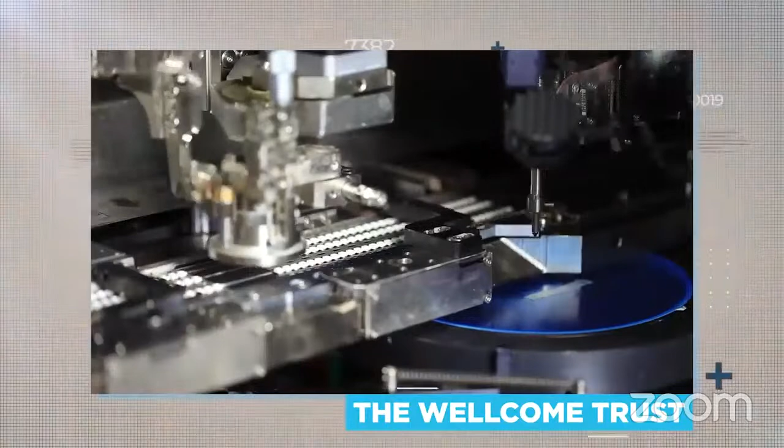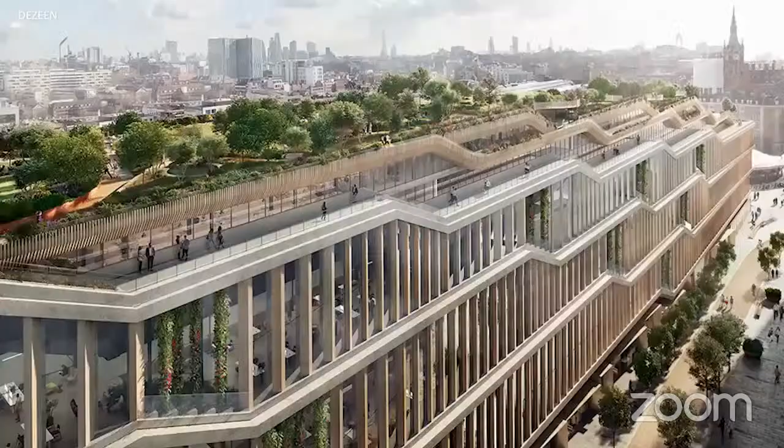Lately, this ultra-commutable egghead enclave has stolen the crown from London's other wannabe tech hub, a grimy junction above Old Street Underground cynically nicknamed Silicon Roundabout. Anyway, enter Google, whose grand new edifice is said to have cost somewhere in the region of £1 billion. It's 11 stories high and stretches 330 metres along the King's Cross railway tracks.

That's longer than London's tallest building, the Shard, is high, by the way. Many Londoners say this development makes a nice change from all those priapic skyscrapers. The new HQ was designed in a collaboration between Copenhagen's starchitect Bjarke Ingels and King's Cross-based Heatherwick Studios.

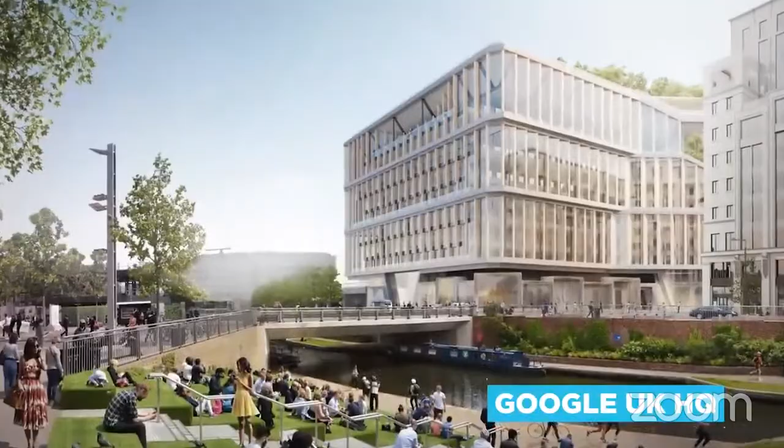Heatherwick, who as it happens just completed a lavish £100 million refit of nearby Coal Drops Yard shopping centre, is no stranger to Cockney icons. Heatherwick designed the flaming cauldron centrepiece for London's 2012 Olympic Games and the city's curvaceous new-look Routemaster buses. Google's UK HQ, which founder Larry Page commissioned after dismissing another top architect's plans as boring, really is

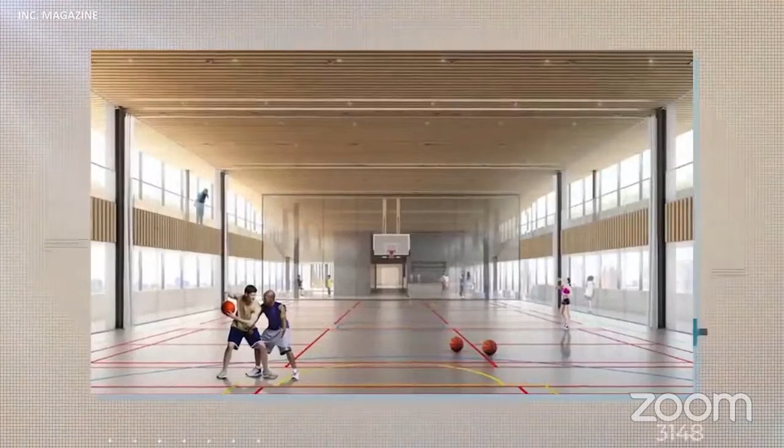a bit special. There's a large multi-lane upper-story swimming pool, cutting-edge sports facilities, a gym, 4 cafes and a multi-use games area. There's a 210-seat auditorium for product announcements and lectures. The whole structure sits atop a so-called plinth of retail and dining spots intended to, in Heatherwick's words, create variety and fascination at a human scale.

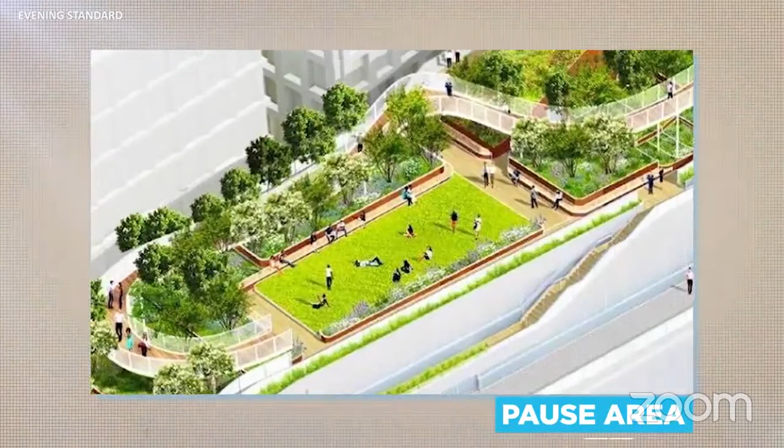On the rooftop, behold a 300-metre landscape garden divided into zones including a pause area for quiet contemplation. There's shady wooded spots dappled with pastel wildflowers, lily-covered fish ponds, rustic beehives, and a 200-metre running track commanding peerless panoramic views over London. Inside, a dramatic staircase floats diagonally through what Bjarke Ingels describes as a single confident volume akin to King's Cross Station's magnificent multi-arched concourse.

All internal routes are easy and flowing and connected in order to inspire opportunities for chance encounters and foster all-important creativity. Fundamentally, of course, it's an office block, so imagine hundreds of people staring at screens and zoning out in meetings. Hey, at least they get nap pods.

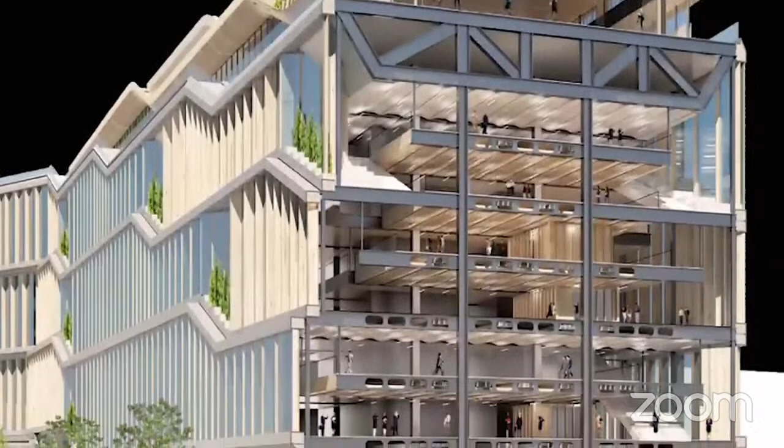The very fabric of the building was chosen in line with Google's so-called Healthy Materials Programme. This initiative traces its origins back to the early days of Google, when a fretful Larry Page would prowl the office with a handheld particle counter measuring air quality and particulates emanating from the walls and floors. Presently, Google runs a handful of offices across London.

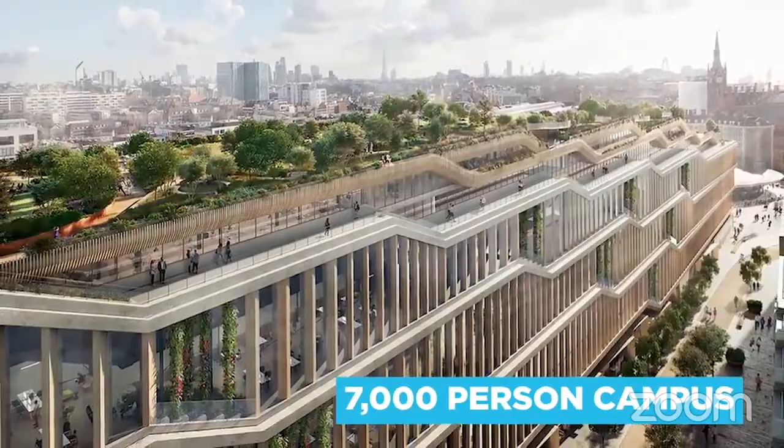Famously, its Victoria outpost has beach huts and Dodgem cars, while staff at Google's Covent Garden branch enjoy access to an allotment. This new building, alongside 2 other nearby King's Cross sites being looked at by Google, will unify its UK team on one 7,000-person campus. The centrepiece will be this, the only wholly Google designed and built building outside the US.

But hang on a minute, you're probably thinking, don't we all work from home now? At the time of writing, almost all of Google's 118,000 global employees are working in their jammies. CEO Sundar Pichai has signalled he intends this policy to stand until the end of June 2021 at any rate. Because while it's clear the nature of work has probably changed forever, Pichai still has faith in the unique alchemy

of in-person collaboration. "We firmly believe that being together, having that sense of community is super important for whenever you need to solve hard problems," he told Time magazine. "So we don't think the future is 100% remote. We value our offices, we value the culture."

Certainly, King's Cross's lunchtime restaurant and bar scene will rejoice when Google's shiny new HQ fills up with well-remunerated young go-getters potentially as soon as next year. Right now, it's still being built. Get a load of those Android logos running up its reinforced concrete core.

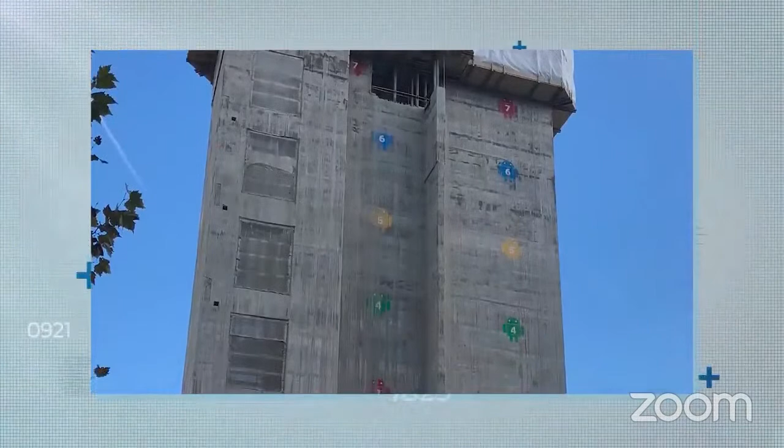But ultimately, Google's huge investment in London is a tonic for those Londoners who worry that, since the pandemic, their city has lost its mojo. Well, if anyone can help them find it... What do you think? Are these vast office hulks nothing but dinosaurs from a bygone corporate era?

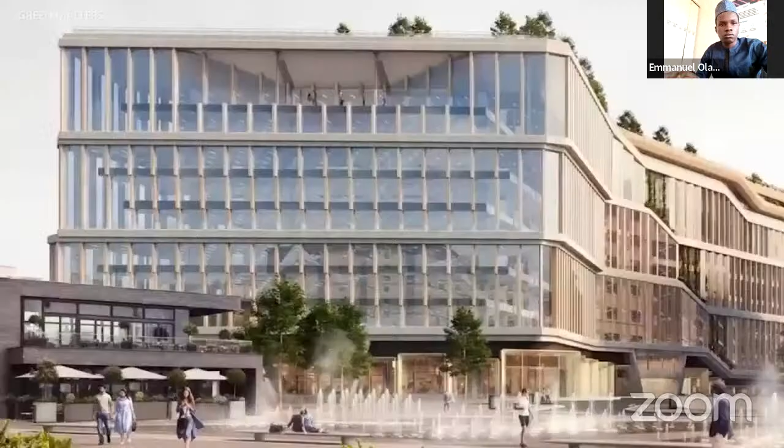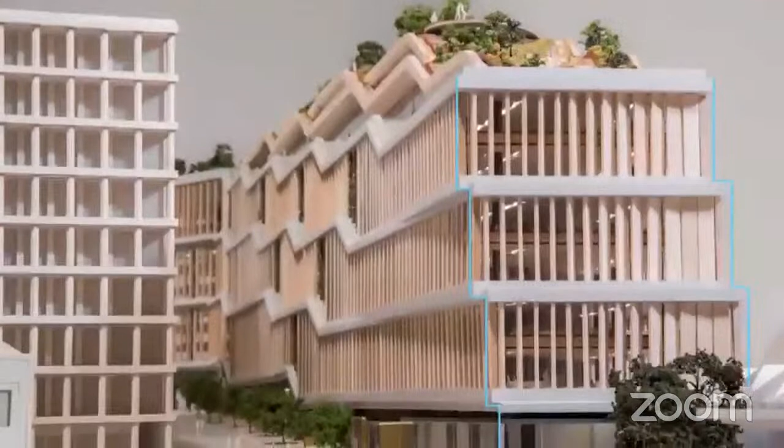This long and low Leviathan is Google's glossy new London headquarters. So lengthy it's been dubbed the land scraper by locals. Over 1 million square feet of floor space, it accommodates basketball courts, a theatre, massage parlours and nap pods shared between some 4,500 staff. So what's up with that unusual design? How's the neighbourhood? And aren't office blocks a bit 2019? Join us now for a grand tour around Google's new UK headquarters.

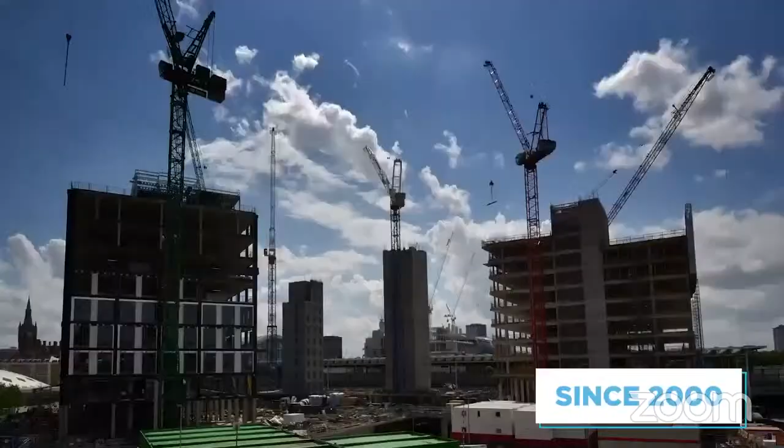The North London district of King's Cross, where Google's new gaff is going, has something of a checkered past. It was first a site of great commercial importance when the newfangled steam railways and London's Regent's Canal opened in the 19th century. Alas, from about 1980 onwards, King's Cross sadly descended into vice and squalor as old-school industry fled the city. However, since 2000, developers have been gussying up the neighbourhood through a monumental multi-decade investment programme. And it's easy to see why big employers like Google and its soon-to-be neighbour Facebook are moving in.

King's Cross is incredibly well served for transport links. You can go anywhere in London by tube in a matter of minutes. Next door you can jump on a train to Paris, not to mention the regular fast rail services to Oxford, Cambridge and Hogwarts. King's Cross is an attractive prospect for workers too. Just ask the local talent. The area is brimming with brains.

Google's new home will be within strolling distance of the British Museum, the Francis Crick and the Turing Institutes, prestigious University College London, University College Hospital, the Wellcome Trust and any number of biotech and AI startups. Lately, this ultra-commutable egghead enclave has stolen the crown from London's other wannabe tech hub, a grimy junction above Old Street Underground cynically nicknamed Silicon Roundabout.

Anyway, enter Google, whose grand new edifice is said to have cost somewhere in the region of £1 billion. It's 11 stories high and stretches 330 metres along the King's Cross railway tracks. That's longer than London's tallest building, the Shard, is high, by the way. Many Londoners say this development makes a nice change from all those priapic skyscrapers.

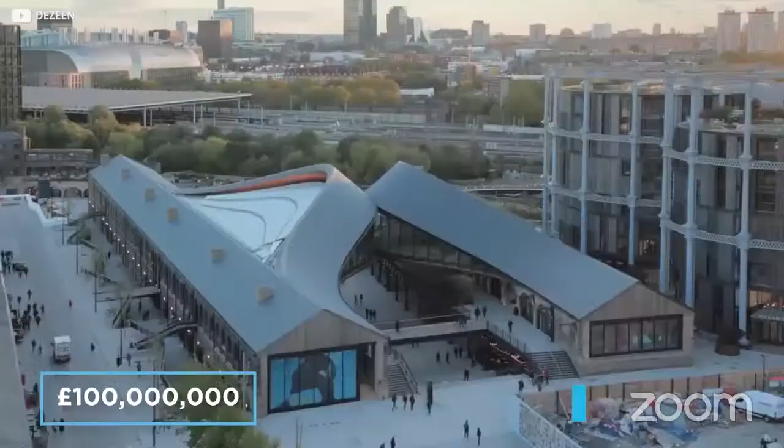The new HQ was designed in a collaboration between Copenhagen's starchitect Bjarke Ingels and King's Cross-based Heatherwick Studios. Heatherwick, who as it happens just completed a lavish £100 million refit of nearby Coal Drops Yard shopping centre, is no stranger to Cockney icons. Heatherwick designed the flaming cauldron centrepiece for London's 2012 Olympic Games and the city's curvaceous new-look Routemaster buses.

Google's UK HQ, which founder Larry Page commissioned after dismissing another top architect's plans as boring, really is a bit special. There's a large multi-lane upper-storey swimming pool, cutting-edge sports facilities, a gym, 4 cafes and a multi-use games area. There's a 210-seat auditorium for product announcements and lectures. The whole structure sits atop a so-called plinth of retail and dining spots intended to, in Heatherwick's words, create variety and fascination at a human scale.

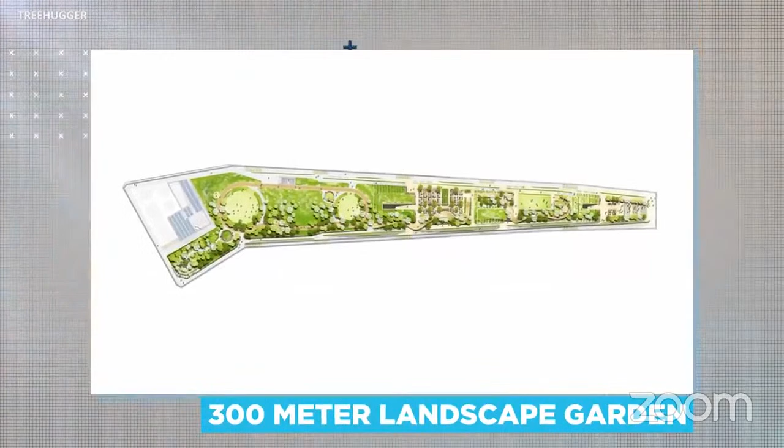On the rooftop, behold a 300-metre landscape garden divided into zones including a pause area for quiet contemplation. There's shady wooded spots dappled with pastel wildflowers, lily-covered fish ponds, rustic beehives, and a 200-metre running track commanding peerless panoramic views over London. Inside, a dramatic staircase floats diagonally through what Bjarke Ingels describes as a single confident volume akin to King's Cross Station's magnificent multi-arched concourse.

All internal routes are easy and flowing and connected in order to inspire opportunities for chance encounters and foster all-important creativity. Fundamentally, of course, it's an office block, so imagine hundreds of people staring at screens and zoning out in meetings. Hey, at least they get nap pods.

The very fabric of the building was chosen in line with Google's so-called Healthy Materials Programme. This initiative traces its origins back to the early days of Google, when a fretful Larry Page would prowl the office with a handheld particle counter measuring air quality and particulates emanating from the walls and floors. Presently, Google runs a handful of offices across London. Famously, its Victoria outpost has beach huts and Dodgem cars, while staff at Google's Covent Garden branch enjoy access to an allotment.

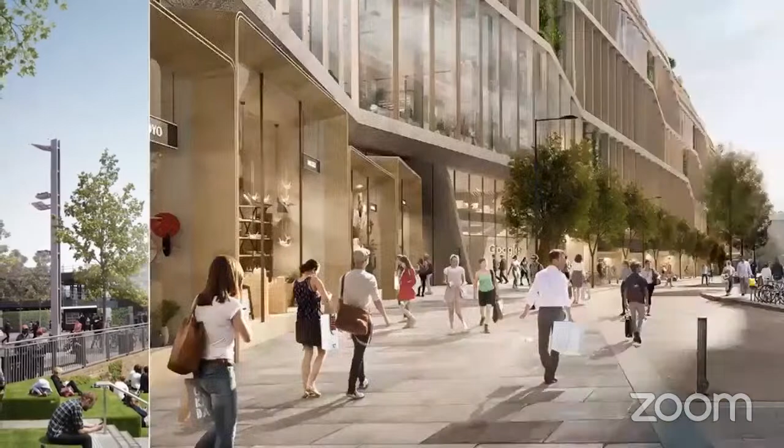This new building, alongside two other nearby King's Cross sites being looked at by Google, will unify its UK team on one 7,000-person campus. The centerpiece will be this, the only wholly Google designed and built building outside the US. But hang on a minute, you're probably thinking, don't we all work from home now? At the time of writing, almost all of Google's 118,000 global employees are working in their jammies. CEO Sundar Pichai has signaled he intends this policy to stand until the end of June 2021 at any rate.

Because while it's clear the nature of work has probably changed forever, Pichai still has faith in the unique alchemy of in-person collaboration. "We firmly believe that being together, having that sense of community is super important for whenever you need to solve hard problems," he told Time magazine. "So we don't think the future is 100% remote. We value our offices, we value the culture."

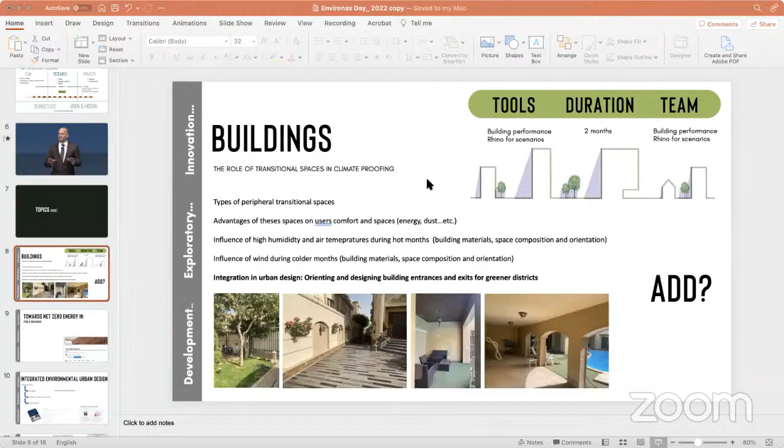Again, I think you stopped sharing it. Yes, sorry. Okay. All right. So these are examples, I will start highlighting the examples. You still don't have it in full screen. I think you might have to stop sharing and reshare again. Yeah, I will. All right. Apologies for the inconvenience. Yeah, apologies from my end as well. No, it does not work. It's not working. Maybe you have to activate the full screen before you start sharing. Okay. That could be a good idea. No, that's not possible.

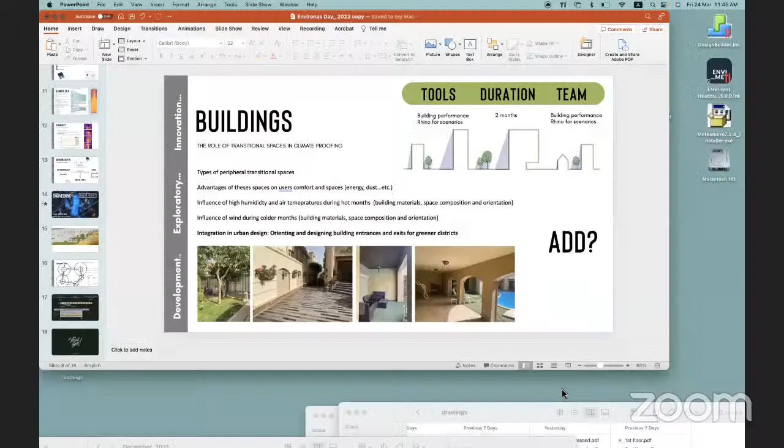All right, perfect now. Thank you very much.

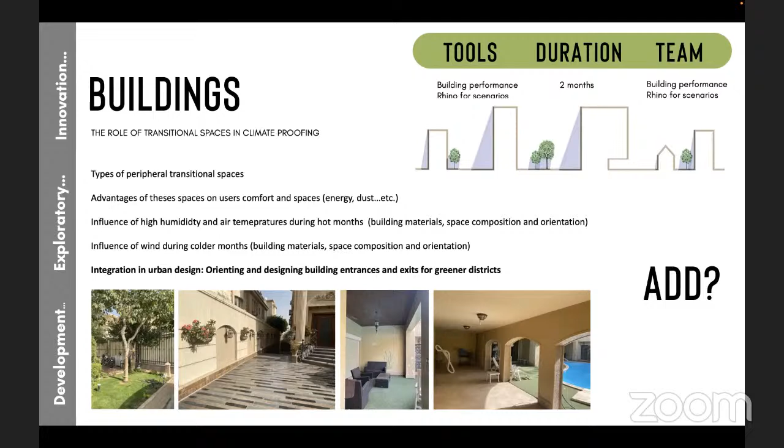Okay, so in this particular research track, the focus is basically on buildings. It's the role of transitional spaces in climate proofing. And transitional spaces are terraces, front yards, all the spaces that create a spatial buffer between the outdoor and the indoor environment. So some environmental monitoring was conducted. I wouldn't want to highlight a lot on that.

So let me now move towards net zero energy, because this was the other example I was going to highlight today, which is the net zero approach in buildings. The net zero approach in buildings is, let's say, optimum solutions for green buildings. So instead of putting a benchmark where you have to reduce the emissions and improve the environmental performance of these buildings while elevating the user's comfort, this benchmark is being raised higher and higher, where you want to achieve a balance between all the spending in energy and all the production of energy.

So you want to produce as much as you are able to consume. And I think this is the whole idea of replenishing the resources, trying to reverse the climate change effect, where we want to replenish the resources that we are discussing in many of the other sessions I'm sure you attended. The idea of net zero for each building comes from that: that you're trying to take from the environment and give back in a clean way.

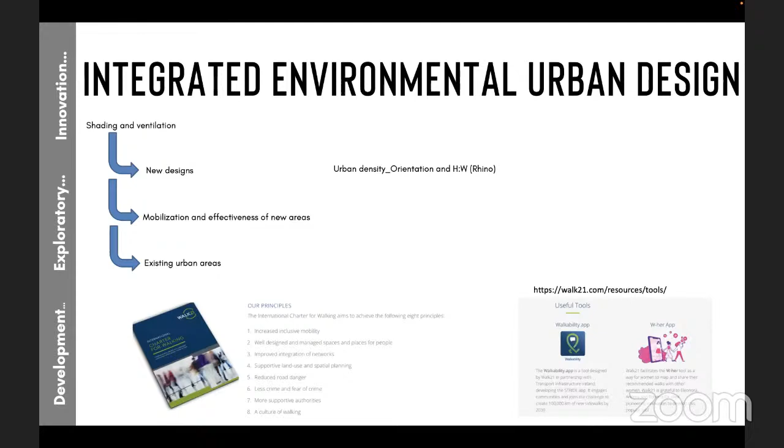This was a research about climate change, and it looks into the different parameters. So we look into the phenomena, the seasonal variation that's taking place in different cities, and how these seasonal variations are being changed over time. So I will again relate it to the example that I was discussing now.

So when we are designing a certain building, and we want to deliver the performance of that building by 2050, we have to take into consideration what effects will be taking place during that year. It will not be like today, because if climate change is affecting us this much today compared to 20 years back, we would expect that the targets we are trying to meet in 15 or 20 years would require a different strategy.

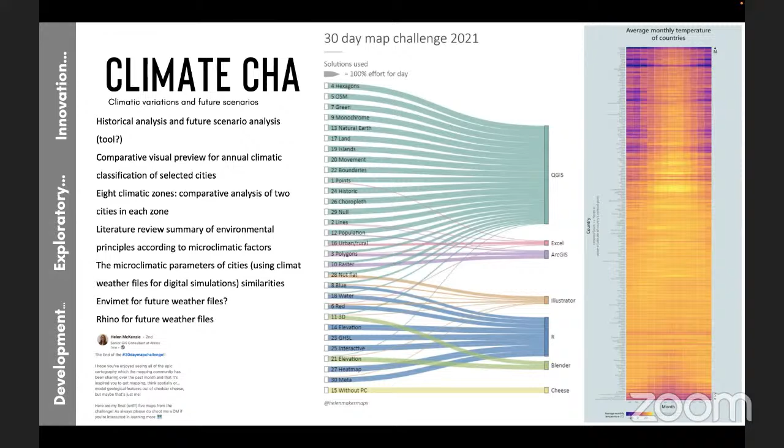So we take that into consideration in terms of the analysis, and it's very important, I would say for younger people who are starting their career, not only to focus on solving the problem at hand. Let's try to find a solution for what's happening now, but perhaps take another leap and look at these effects and try to provide the solutions we provide today in buildings, for example in terms of design solutions, or in another sector, that would fit 15 or 20 years from now.

So the intention that I consistently try to look into is how people, user-friendly environments, would be able to affect back the climate and the built environment. We want to convey our message that the needs and requirements of the users should be taken into consideration when we design cities, which is sometimes ignored, or when we design buildings. Then we live in these cities and buildings, and they affect us sometimes negatively, but we're not able to affect that back. We're just harming the environment more, either by providing alternative solutions, demolishing, or extended energy demands and so on.

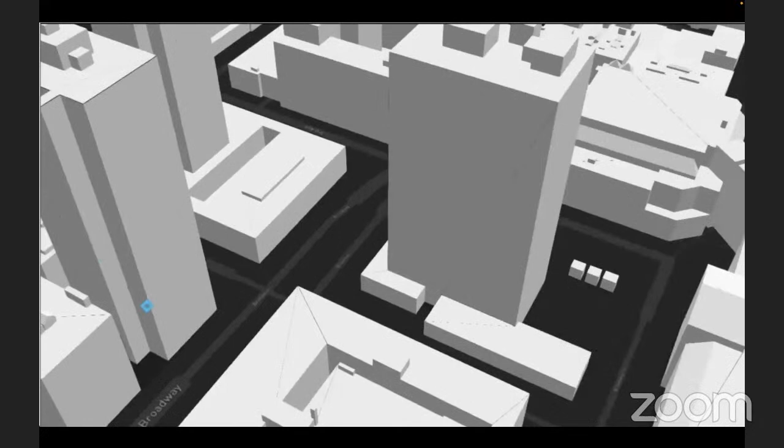So this video basically discusses the idea or the role of technology, which is taking place vastly now in cities and buildings as well. The idea of smart buildings is a small scale of it, where everything is automated. On a bigger scale, it's the IoT or the big data part in cities and how each and every building is being linked together: infrastructure, water consumption, energy demand, with many other things.

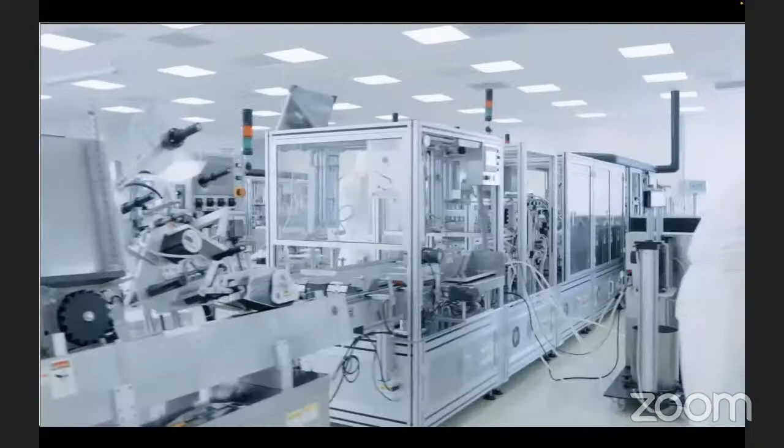So all of these layers could not only be used to convey what's happening on real ground, but we could also be providing solutions from these data based on actual research that we conduct. So yes, they do deliver a message, but I think the innovations in digital twinning are taking place currently in few countries worldwide. We look into that on a very small scale.

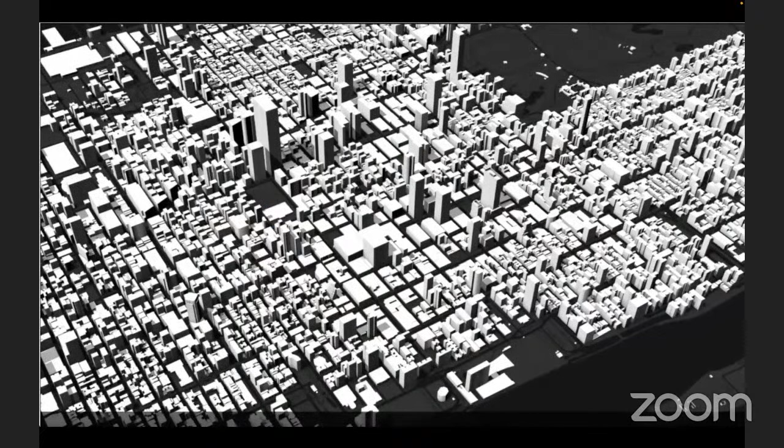So how can we mimic, let's say, imitate what's happening in this particular city in a digital world or in a virtual world? And when we mimic this particular condition based on the existing scenario, we can then derive different scenarios, and these different scenarios could have the interventions of addressing climate change or even trying to find other solutions. And these solutions would be tailored for each and every specific context.

So I wouldn't say that we are trying to find solutions for these global problems that we look into, for example, in different cities that we are currently at. Yet at the same time, this variety of solutions fits different developing and developed countries, I would say.

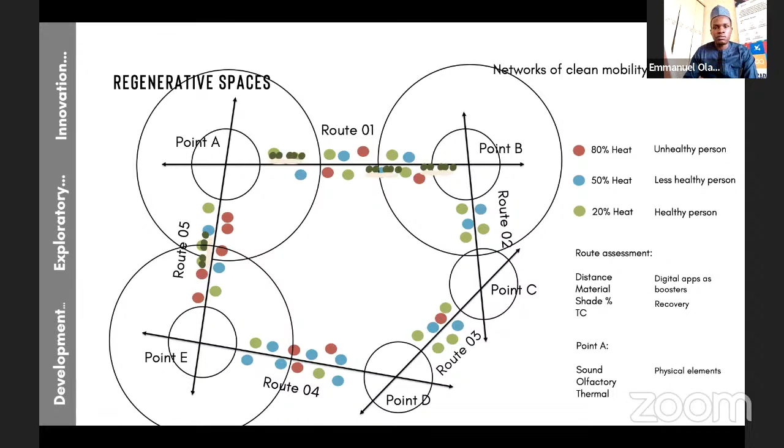Okay, so basically, this is touching upon the last video that we have seen. It's very important when we discuss these IoT and digital twinning scenarios. We look into that, not that we conduct them. I do not conduct them myself. However, you look into the behavior of people. I go back to the idea of

human-induced climate change. So the behavioral patterns of people in streets and in buildings, and how they deal with reacting to the environmental catastrophes, the environmental changes that are taking place, would in itself give a lot of influence on people who are able to deal with these solutions and probably try to find optimum scenarios that fit certain contexts.

So this in itself looks into the idea of walkability between different spaces and how much heat is being imposed on each and every person. And if they are able to convey that through an application, basically, so report that I'm feeling hot, I'm not able to walk through this route anymore, it's bothering me very much, how much would this small piece of information log into the bigger picture?

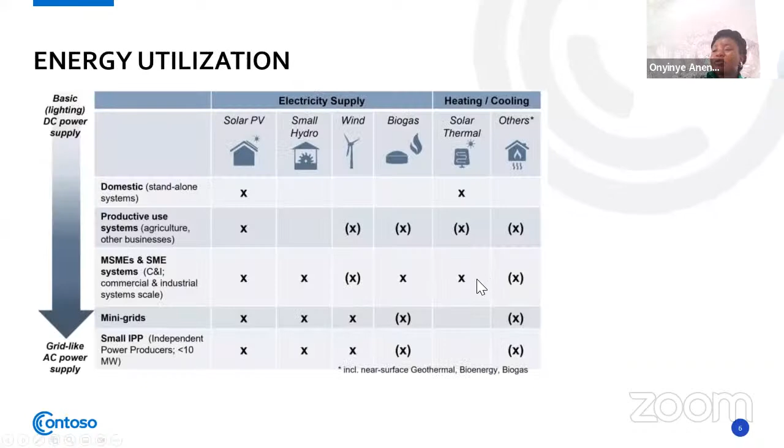Understand how renewable energy is going to be managed in the future. So I'll go back to the slide. I've spoken about standalone systems. When we go back to the slide now, you can see, generally, even today on the grid, there's something we call base load and peak load. So I use your house as an example. In many houses, except you're really trying to conserve energy, you don't turn off your fridge. The fridge is always on, right? So your fridge is what is referred to as base load. That load, once power is available, is always on. It's on at least 95% of the time.

Now, because of reliability, you want to be able to have an energy resource that can supply that base load. Remember that we don't control the sun, we don't control the wind, right? It was raining this morning. If say we wanted to build a country where we use energy from the sun as a base load, we don't have ultimate control over it, so we may not be able to assure our base load. And so, at least what is obtainable today, is that you still use non-renewable energy resources for your base load because you control the feedstock.

Like I can plan for gas to be available for the next 1 year or for the next 10 years. I mean, we see what's happening in Europe because of shortage of gas and what's happening with Russia. They had a PPA, an agreement with Russia to supply this quantity of gas. If not for instances like what's going on, you can actually have a contract for gas, go to a gas field, understand the gas that is available and when it will be depleted, and say, I'm going to use this gas for the next 5 years. Build a pipeline that brings you the gas and you can plan for it. And that's what you normally use for your base load because you know that load must be on.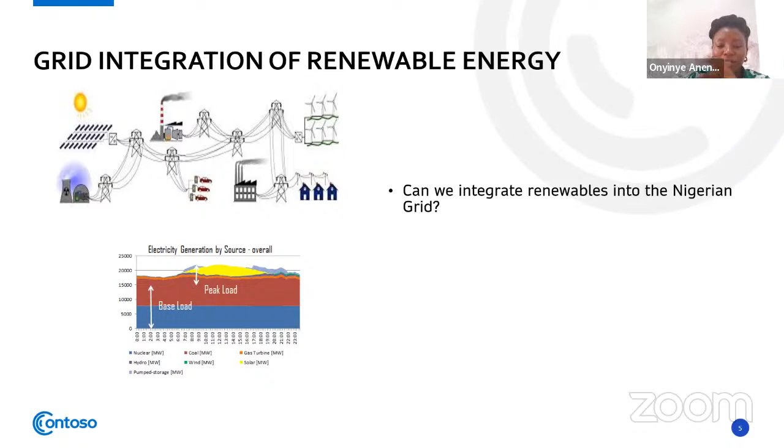Are we there yet? Do we have the condition precedents, the things that must be available today to then integrate renewables into the grid tomorrow? No, we don't have it yet. Can we get there? Yes, absolutely. Very possible and also very controllable. Like I said, it's not rocket science. It's been done across the world.

So I move quickly into energy management. My time is almost up. Energy management is just the planning and operation of energy production and energy consumption. You can take it from your basic level, like in my house today. How do I manage my energy? Many people today have NEPA, power from the grid, probably a generator, and probably an inverter. You take it from the smallest level to the largest level. Like the question you just asked about integrating renewables to the grid, that would be national energy management. So I'll just explain it in simple terms.

Energy management is just planning the operations of energy production and consumption. In many of our houses, our supply is from the grid, most likely with a battery somewhere and a generator somewhere, gas or diesel. So you need to plan, when do I want power? Today, we don't know when we're going to get grid power. Currently in my house, I'm running on my inverter because there's no grid power. You want to plan that, country-wise or maybe as the energy manager of a factory, but I'll take it down to the basic level, which is a household.

Let's assume you know what band you are on the grid, and that you're going to get 16 hours of supply. The question is, how do you get the other 8 every day? Are you going to run your generator for 4 hours and then use your inverter for another 4 hours? Or are you going to say, I just need power during the day to work. If I go to bed, I'm not an AC person, I don't need cooling, I just open my windows, so it's fine. So all you need to plan for is 18 hours of the day when you're awake. How do you supply that power for 18 hours every day?

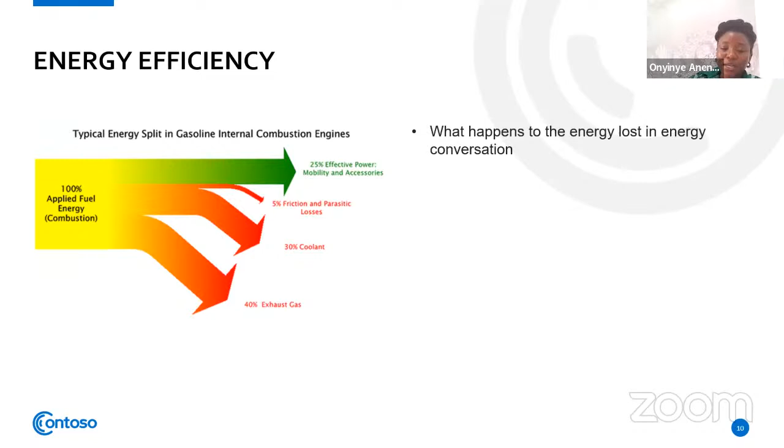So on one hand, engineers are trying to design more and more efficient systems to make sure that the conversion processes are more efficient. And on the other hand, on the utilization, we need to start having utilization conversations so that we don't waste the energy that we use. This is the end of my slide.